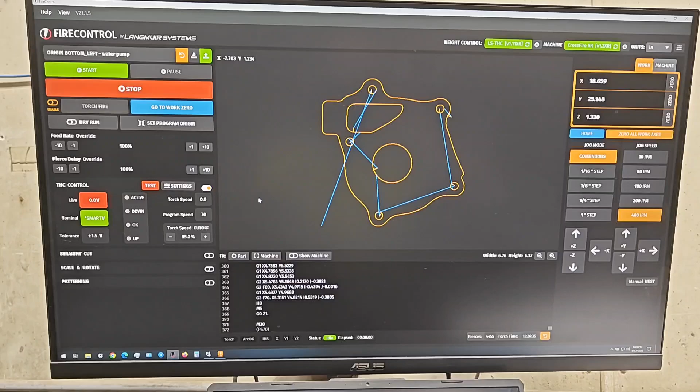Good evening, YouTube. Tonight I'm going to try to make a video to explain how I use this program, JoyToKey, to program one of these, a cheap $20 Xbox controller, to control my Crossfire XR.

It doesn't really matter what kind you get. I have that one, and I also have this one. The only thing that matters is they plug into your computer. This one has a dongle that looks like that, and the other one has a dongle that looks like that.

There are currently two joysticks here in JoyToKey, joystick 1 and joystick 2. This one runs on 2 AA batteries, and this one is USB-C rechargeable.

So pick one. You'll notice that when you use the joystick, buttons light up on your controller. That's what JoyToKey is seeing, and all you have to do in the function column is program it to do what you want. I'm doing this one-handed.

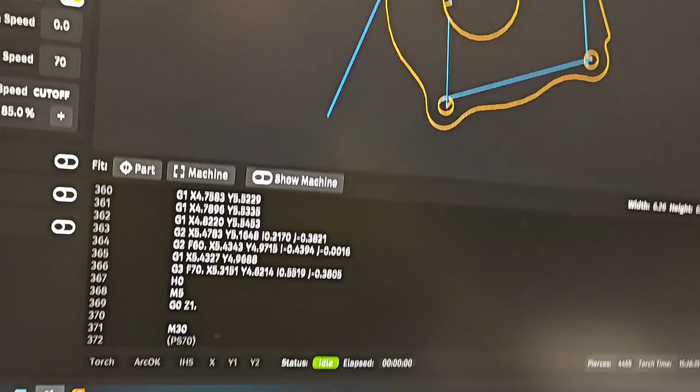What I did first, you'll see stick 1, I have mouse in all 4 directions. So what that looks like on screen, if I go up to my FireControl run screen here, you'll see my mouse go in all kinds of circles there. That's simply programming stick 1.

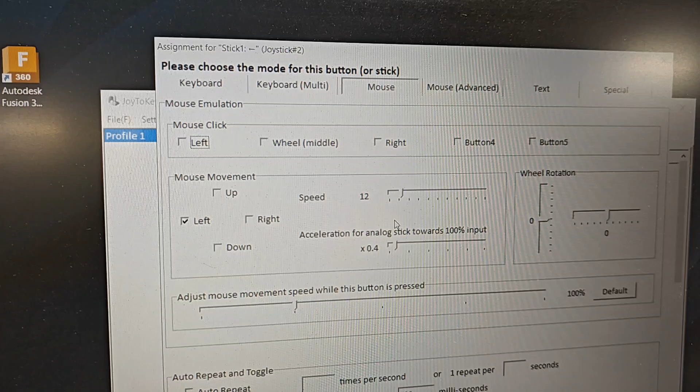If I double click it, it brings up this thing. I have it as mouse, and the speed at 12 because it's a lot easier to control. I have the acceleration at 0.4. You can do whatever you want. This is under mouse, not keyboard mode. So that's what stick 1 does.

We'll cancel this. Next, for stick 2, left and right I have nothing programmed. Up and down I have page up/down, which gives me Z axis control on my XR. If you look over there, you can see my Z axis going up and down. I have nothing programmed for left and right, just up and down on that stick.

Next I have the D-pad. This is actually very straightforward, just simple keyboard basic emulation -- it's my arrow keys. I'll keep this brief and to the point. You'll see my D-pad, which is obviously this one right here. It's just left, right, up, down.

Then we move into the rest of the buttons. The only way you know what these are is by getting your controller and pressing buttons, and you'll see them light up. In this case you have X, Y, A, and B.

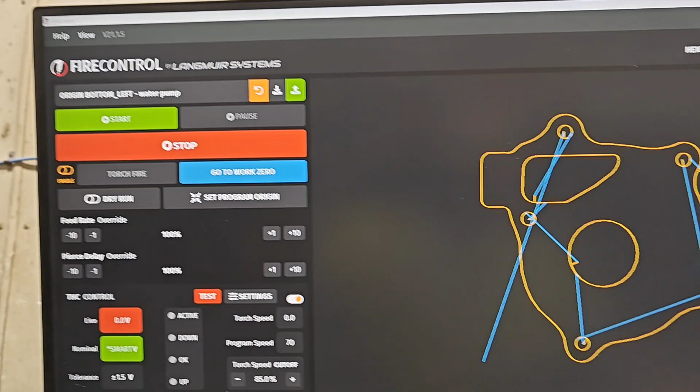Button 4 is Y, and I programmed that one to space. You'll know this if you go to FireControl, upper corner, under Help, keyboard shortcuts looks like this: arrow keys, page up/down for Z, and tab. Start program is Alt R, which interestingly I haven't gotten to work very well. Pause is space, stop is Alt S, 0 is Alt X and Alt Y, 0 all axes is Alt W, and home is Alt plus H.

Knowing that information from FireControl, you can come down here. With my X, Y, A, B buttons, I thought X would be nice to program as Alt W, which is 0 all axes. The cool part is you can use your D-pad to drive around where you want on your sheet, then hit X, and that literally does X marks the spot -- that's your home. That was easy to program.

You just do button 3 as Alt W, and the way you stack that is you simply put them in order here. It's keyboard emulation in basic -- you put Alt in the first box, W in the next box, and the next two are blank. It simply has no auto repeat, no toggle. You just put those in those boxes.

And the green button here is program start, and you'll start to notice that I have these. It performs a left click at this coordinate. Now this is a 2K monitor up here, and so what those coordinates look like is going to be different for each and every screen.

So this is underneath mouse advanced. It does, and you just kind of, there's where it's showing. Your coordinate is from 0 to 100 across your whole screen, 0 being there, 100 by 100 being there. And so this one is doing a left click at 517, which interestingly enough lands right up there on the start.

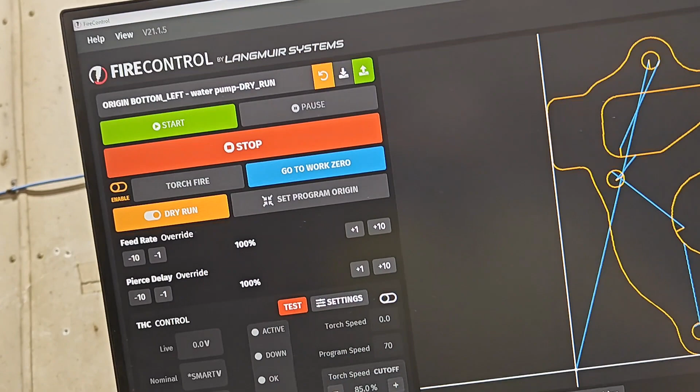If I make sure my cursor's in this page and I hit my green button on here, you'll notice it clicks literally right there. So I hit stop. Now I've stopped my program, and then I can do another press and it closes that dialog box. So that button 1 is a left click at that coordinate.

And then moving on, you'll see I have buttons programming other buttons. So when I discovered that I could stack more than one thing, I went all the way down. These are virtual buttons. Button 27, 28, 29, 30, 31, 32 are all virtual buttons that I can call in a sequence without messing up this button stack.

So what that does for me is when I do a sequence, like here you'll see button 12, which happens to be the trigger - it's my right hand trigger on my controller. You'll see it has buttons 29, 28, 27, and 31. And if you open that up, you will see that it is in keyboard multi. Input 1 is 29, then 28, then 27, and then 31.

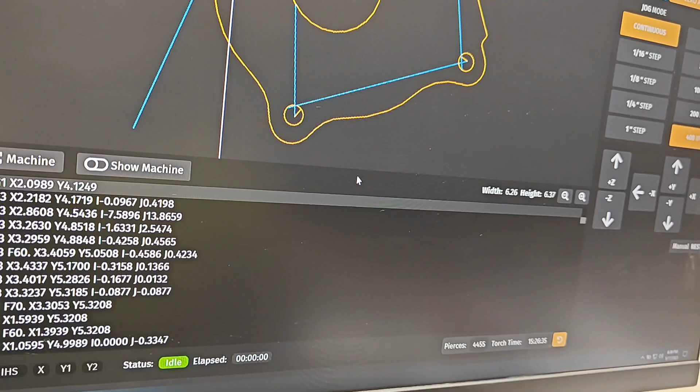And down here in the options, I have switch rotation. It does input 1 to input 2 to input 3 to input 4 to input 1. It just rotates through them. And what that does is when I am in fire control and I'm on the other side of my table and I would like to jog, it allows me to hit my trigger, and it's toggling through my speeds one at a time.

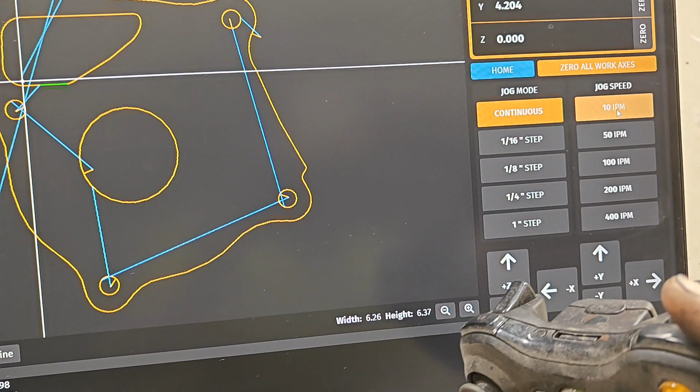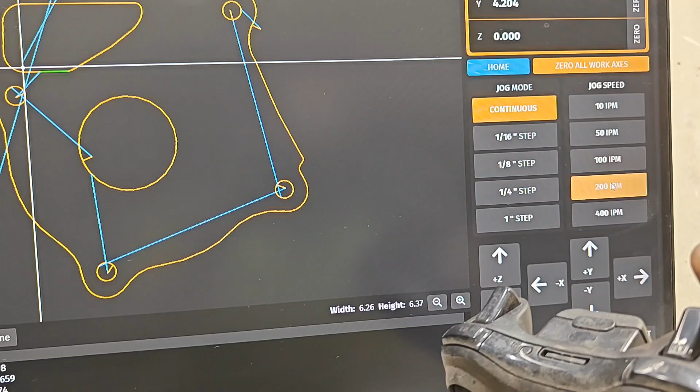It doesn't hit the 400 one because I have my right button, this button here, programmed to always land on 400. See how when I'm clicking this, it's hitting the 400. But this trigger will toggle through my speeds, and then if I'm going slow and I instantly want 400 inches a minute, I'll just hit the other button.

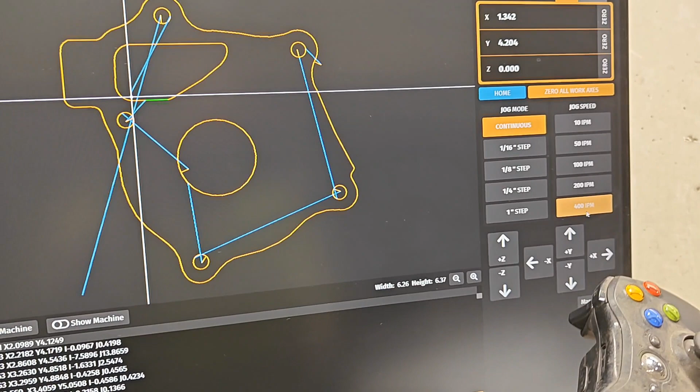And right along with that, on the left button like that, I have tab, which just toggles my continuous or my step, which is a fairly basic feature there.

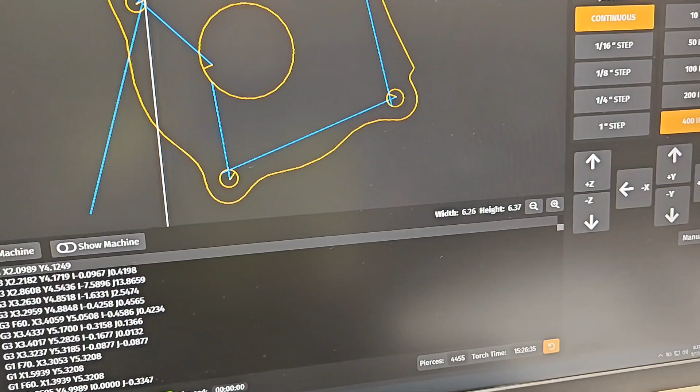And I probably might have missed this, but the trigger on the left - where's my mouse, can't find this - the trigger on the left is simply mouse left click, so I can actually drive my mouse around, and notice if I click the trigger, it does a left click.

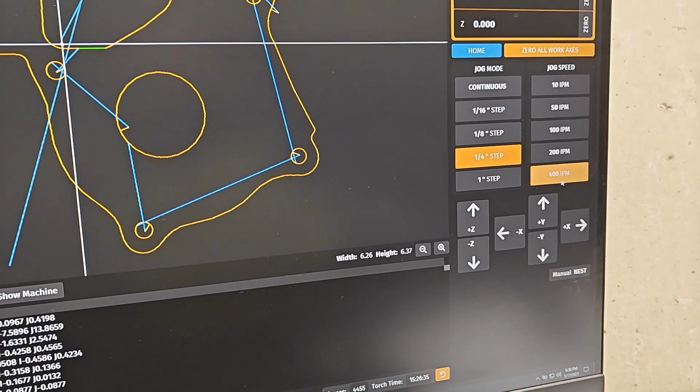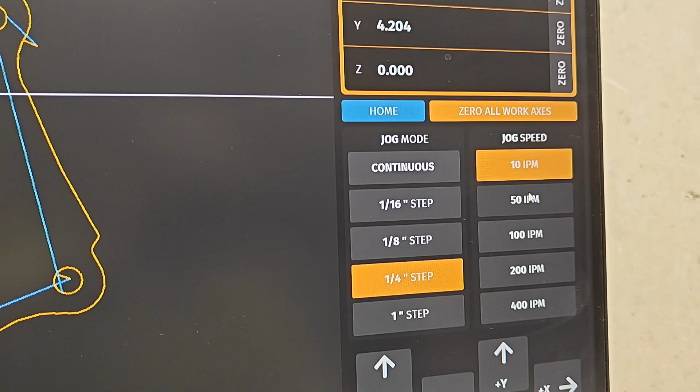So the other trigger is a toggle through speeds, with this one being 400 inches a minute. How did I make it land on there? Trial and error. You see that one lands there, that one lands a little bit higher, that one's about right in the middle, that one lands right in the middle. So yeah, you just have to do a little bit of trial and error to figure it out.

Same thing with one-click homing that I did. I have the start button programmed to do homing. Button 8 is the start button on the controller, and that does an Alt-H plus button 32.

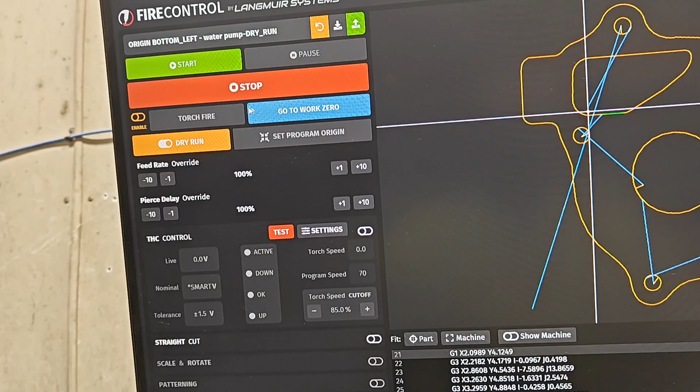The reason for that is when you hit Alt-H, it asks for confirmation. Like if I go up here to the FireControl and I hit home, this dialog box pops up that says, hey, are you sure you want to do this, home machine. So it doesn't do any good to have a shortcut.

You still need to be by your computer to make that work. So what I did down here is your Alt-H plus button 32. This is a keyboard multi. You stack Alt and then H on top of each other because that's the first thing that it calls, and then button 32, which happens to be a left click on that dialog OK box or the home machine thing. It says execute from input 1 to input 4 in sequence at the specified duration.

So let's see what I have for duration. I have a 20 millisecond duration, so it'll press Alt-H for me and then button 32, 20 milliseconds apart. It'll execute them in sequence.

Button 32 is going to be a left click at 57.52, which, as you can see, is going to land somewhere in the middle of my 100 by 100. The best way I can tell you what it does there is it jumps the cursor to the target position when this button is pressed, and then it performs a left click.

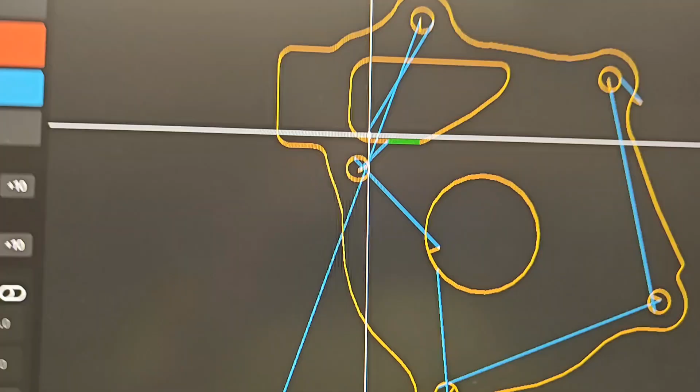This up here is my primary display, so it's obviously working from the top down. Multiple displays make it a little bit different. So that's how I did that.

Let's see, what else didn't I hit yet? One of the things that I use a good bit is to be able to return to my work 0. Like this button right here, go to work 0, is very useful.

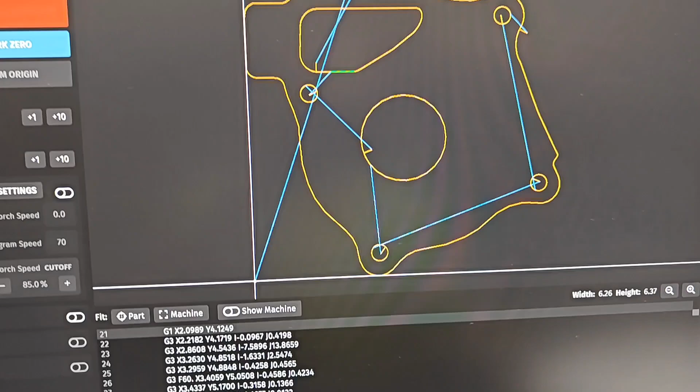I have that one programmed to back. I use back because that makes me think of wanting to go back to my X, Y coordinates. So if I press back, the table went back to the XY coordinates of my water pump flange there.

If I drive it around -- oh, I'm in really slow mode here. If I drive it around, there I'm at 400 inches a minute, and then I press back, it will do a left click at the go to work 0. You see my mouse cursor moved right there.

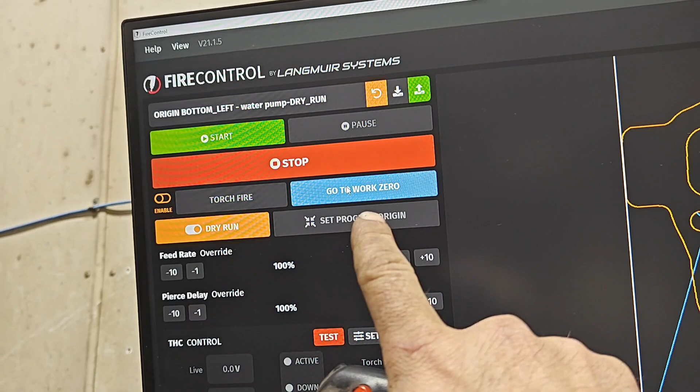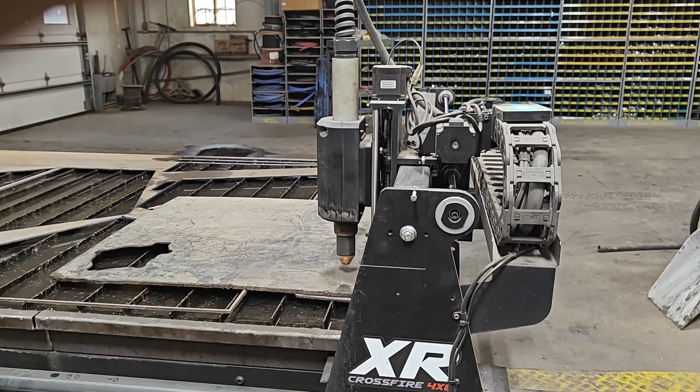Let's just do a dry run of this program just to show you a little bit what I'm talking about. Obviously green is go, and so I hit green and it starts to cut, or pretend to cut. And then if I want to do a pause, yellow button, that is obviously paused. And then to go again, you have to hit green.

I hit my green button, because space is not unpause. Space is just pause. So now it's paused again, and then green button makes it go again. And you can be doing that from across the room instead of coming over here to the table.

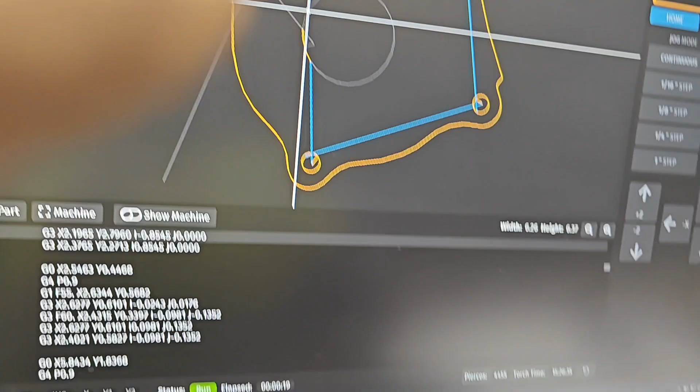Okay, I messed something up there when I was doing the dry run, but anyway, I'm going to show you how I home my machine. If I hit start, which does a homing thing, you'll see that the cursor is right here, my mouse is there, and my machine is homing.

That's what I talk about when I say one button home. So obviously don't press that button unless you want to home the machine. So that's what I was going to show you.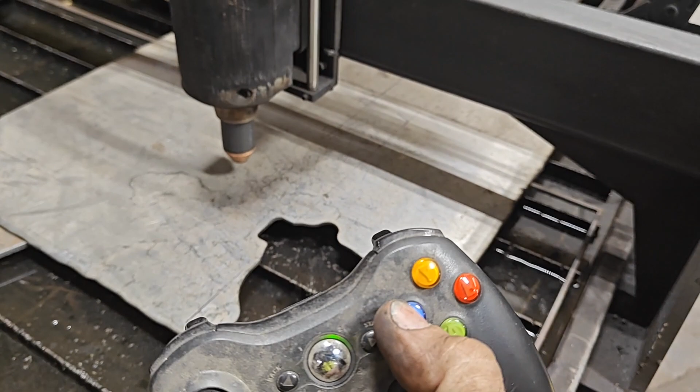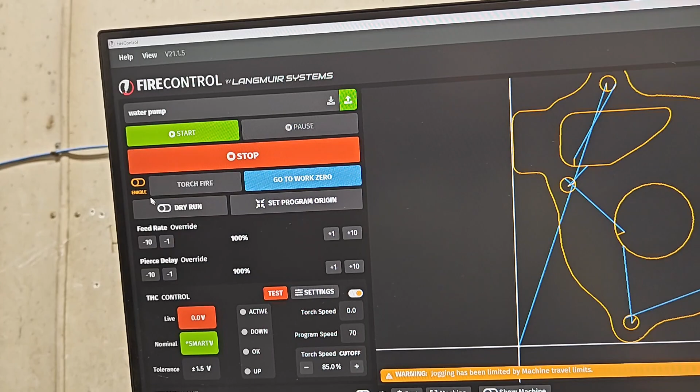If you are running this program, let's zero XY right there, and then make sure we do a dry run. This one-handed video is less than ideal.

At any rate, hit the green button for go, and then let's suppose something goes bad wrong and you hit stop. What it's going to do is bring up a dialog box that says the program has been canceled and you have to walk back to the computer.

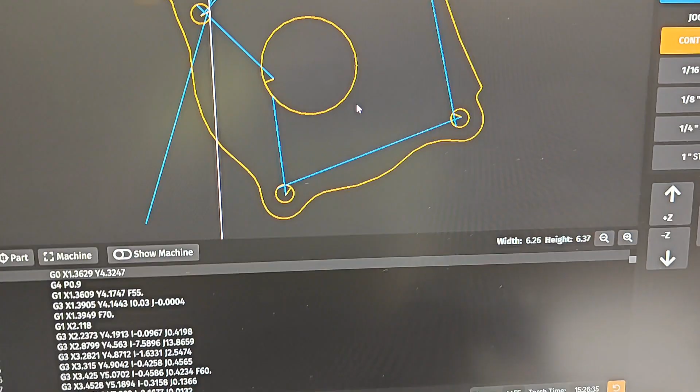What I did was pushing straight down on the left joystick makes a left click right where that dialog box is. I don't even know which button that is. Straight down on my left joystick. Let's see if it shows up here.

It is, there it is. It's button 9. I have programmed for a left click at 5748, and that is just to click the OK dialog box on a stop. So you'll see there's a lot of buttons I didn't use.

There's other buttons, and some of these are dead. I put them in there and then ended up not using them. But I've quickly discovered that it's easier to just create a virtual button like this and then call it with a physical button. That's why you'll see up here I have button 6 calling button 30, so I don't mess with my mapping. I just go to button 30 and change it around instead of messing up my setup.

So button 30, that's just simply it there again. You can call in your keyboard, you can call your virtual button that you created all the way down at the bottom. So yeah, that's just about it. I don't know if I'm missing anything.

This JoyToKey is a free program. I did pay them a couple bucks for it because I like when people make utilities that make my life easier, and it's basically pay for it a little bit if you feel like supporting the developers.

So yeah, it's very powerful once you figure it all out and mess with it. Basically, trial and error is your friend, especially when, so this is a 1080 monitor or laptop screen here. This is a 2K 2500 by, I'm not sure. But the other thing you'll notice about...

If I'm in this program messing about and I'm pressing my buttons, it's not going to do anything. Like, it's not controlling FireControl even though I'm pressing my controller. You have to have this utility open, but you have to be active in this window. Like if I click in this window, now it becomes, this window is active and this one's just there, and then now you can see my tables being driven by my controller.

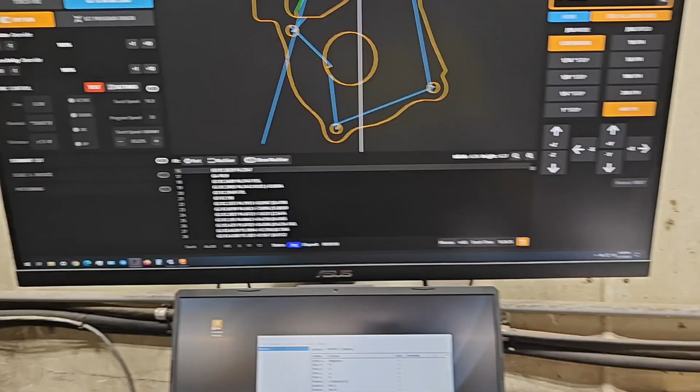So, if the JoyToKey utility is not open on your computer, your controllers won't work. It can be minimized as long as it's open. See, there it is down on the taskbar.

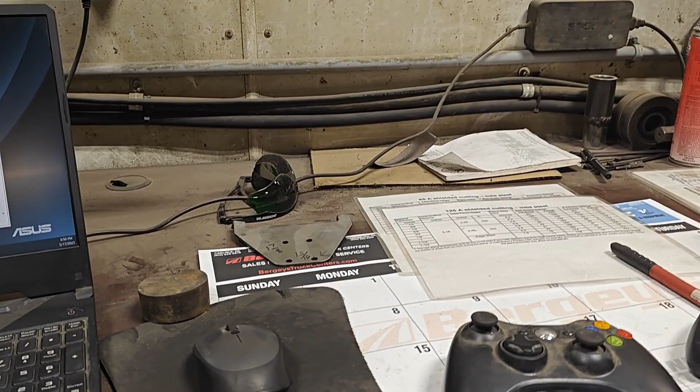So yeah, that's about it. It starts automatically for me when I open up the computer, and it doesn't matter which one I grab, this one or this one, but you just have to wake them up and they both do the same thing. That's been about it. If you have any more questions, put them in the comments and I will try to answer them.

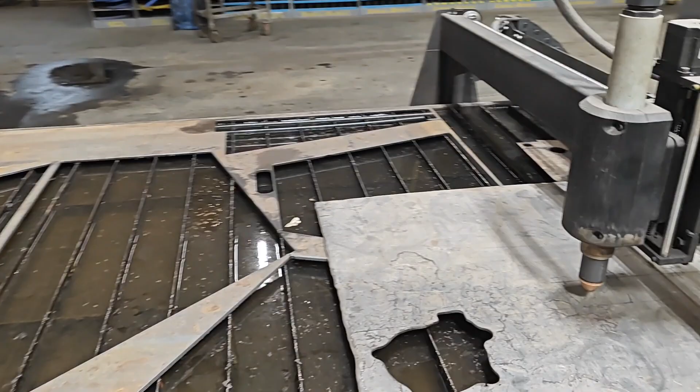For myself, it has completely transformed the ability for me to be, say, all the way over here, and let's zero the XY here, and of course I got a big screen so I can read it, and then hit start from here.

If something goes wrong from over here, I can hit the X, the stop, and I can clear the fault and continue to drive it. I can do homing, I can do...

Z up down. That was one of the things that, for me, if you don't have a computer with a dedicated page up down, it gets frustrating to run your Z axis. And here I just have it on a stick, and then you have your speeds, and I can toggle through my speeds if I want to go really fine.

See there, it's going at 10 inches a minute. And if I want to instantly go to 400 inches a minute, I can just tap that button, and it totally changed how I feel about operating this machine.